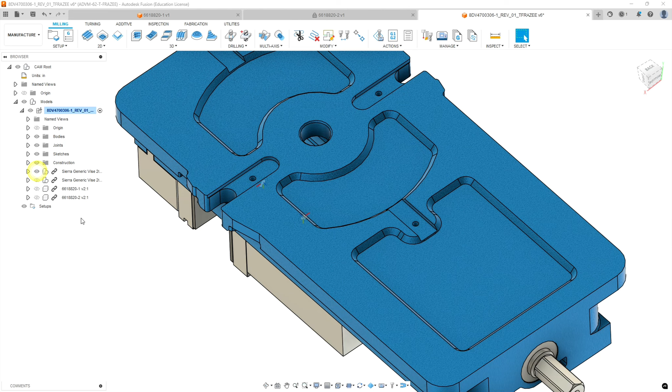Okay, so we're going to do machine operation 1 first. So let's go to manufacture mode, and we're going to look at our models, and we want to make the second instance of the vise and the soft jaws invisible and make the first instance visible. Flip our part back around. We're going to show our stock body, which we may have hid in the previous step.

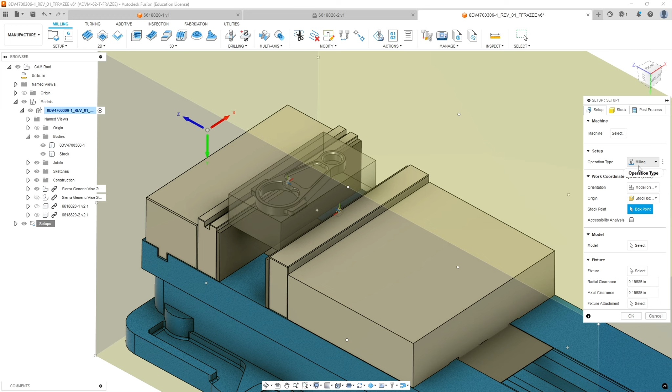And we're going to make our first setup. Right click, we're going to create a new setup. And again, it defaults to taking everything. That's not what we want. So we're going to go to selecting our model, which in this case is going to be the actual part on the bodies. And then we're going to go to stock, and instead of relative size box, we're going to go from solid. And the solid we're going to select is the stock that we modeled. Should be 4 inches by 1 inch by 2 inches.

Now we're going to go to the post processor, and we're going to call this 306-1 part. So it'll be 306-1, and we're doing op 1. Our program comment is going to be op 1. And I'm going to put in a note, hard jaws with 1-5/8 parallels. Okay, so hopefully that all fit in the notes. Makes that clear. We're going to use work offset 1.

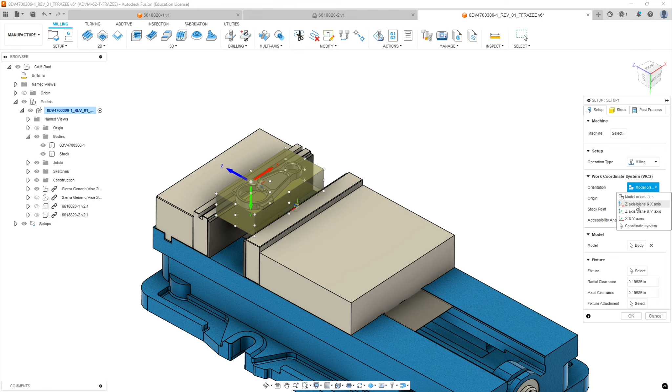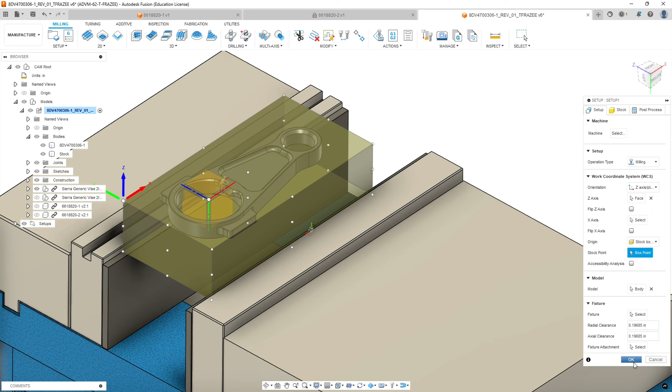Okay, we're going to go back to the first tab, which is the setup, and we're going to select our origin. So we're going to go to z-axis plane and x-axis. We're going to select the stock, which will give us the z pointing in the right place. Okay, we're going to put our origin at a stock box point. It's going to be top left corner. Now we're going to select OK. We're going to change our setup to op 1. Okay, so now let's make our stock volume invisible. Since it's defined, you'll still see it when you have the operation highlighted. And let's start machining here.

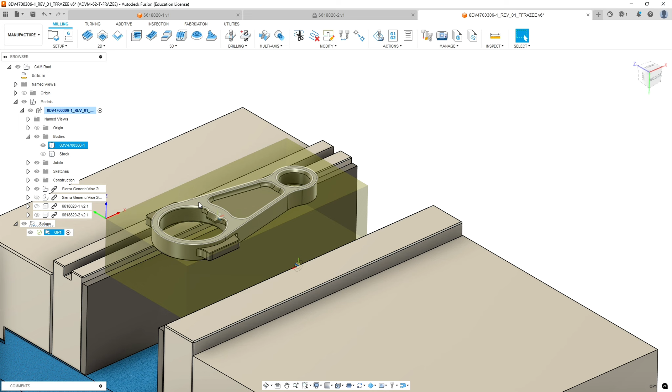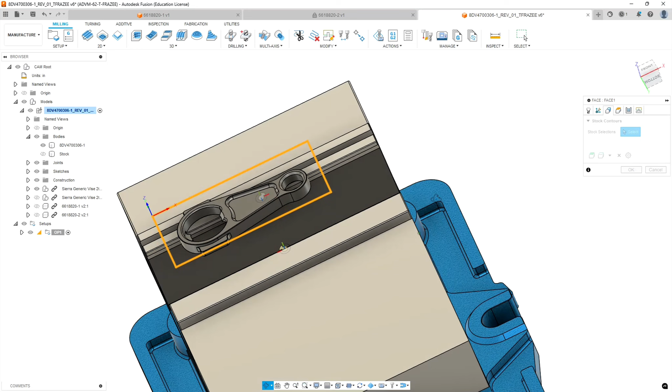Okay, for our first operation, we're going to mill down the face of this. We're just going to use our trusty face mill. We're going to do a facing operation. We're going to select from our tool library, tool 1, our 3-inch face mill. For geometry, the default boundary that's defined by the stock. We're going to go to heights, and we're going to leave most of this at default, and we're going to start at stock top and cut down to model top. Okay, so it should look something like that.

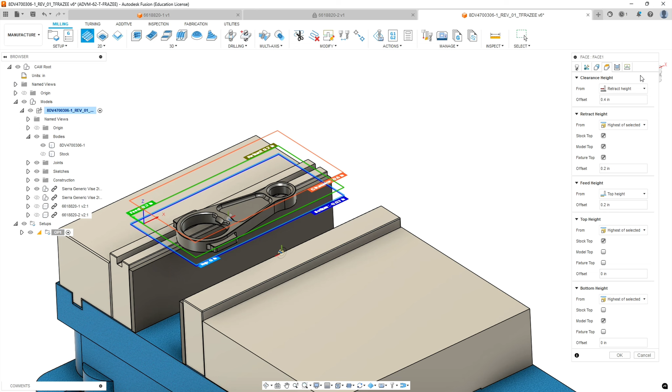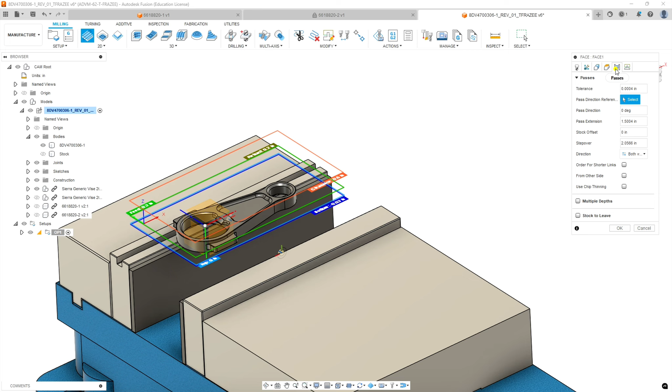That's default. I do want to say, if you don't already default to 3000 RPM, let's bump this RPM up to 3000. We're getting a better finish. If it already defaults to 3000, then I've fixed it in our tool library. Okay, we're going to go to heights, leave those at default again. We're going to go to passes. You can choose the pass direction. We may just take the default. Our pass extension right now is 1.5 inches. Some of our stock is coming in a little bit longer than it should be. So let's bump our extension up to 1.75. So it gives us an extra 1/4 inch of extension.

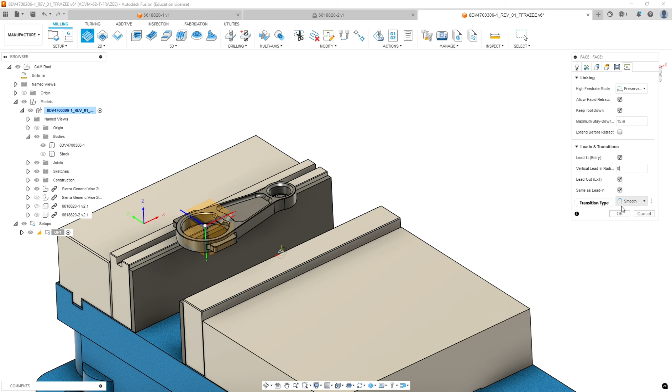And our step over, I believe we can leave it default. We're not going to do multiple depths. We're only taking 30 thou off. And let's go to the linking tab. We're going to do a lead in entry. Our vertical lead in radius is going to be 0. And we're going to do a lead in and lead out. Is that okay? So you just get one pass. Comes in off the workpiece, goes across. Alright, next.

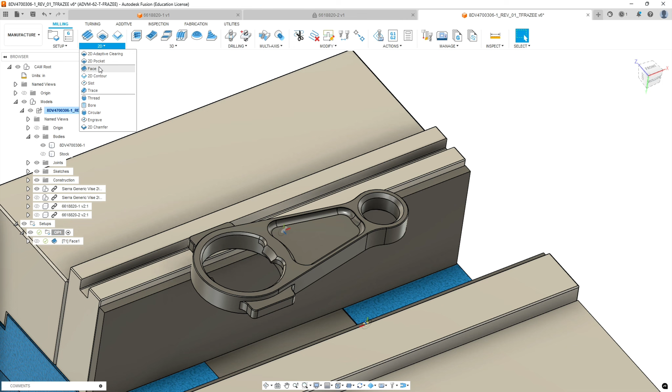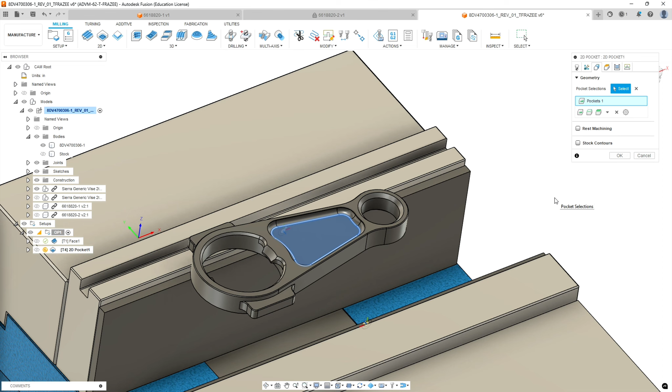Let's work from the top down. So our next feature is this pocket here. We're going to go to 2D. We're going to do a 2D pocket, and we're going to select our 1/4 inch end mill from our library. And what we're doing is we're just going to cut the flat here, and we're going to come back with a ball cutter and trace around the outside to make the fillet. This was intentionally redesigned to have a 1/4 inch end mill be able to go in this corner. If we change that design and add a tool to the library, maybe we can make that smaller and sharper like the original design. But we're going to get a pattern here in the center. All right, so our heights tab, we're only going 1/16 deep.

So I don't think we have a lot of depth to go. We're going to go from model top instead of stock top for both of these selections. We've already removed 30 thou. And we're going to go to the selected contour.

Now we're going to go to the passes tab. And let's go over our options. We are going to use morph spiral. Okay, that will give us a more efficient cut. We will do multiple depths just because we want to do a finish pass on the bottom, and that's a nice clean step over there.

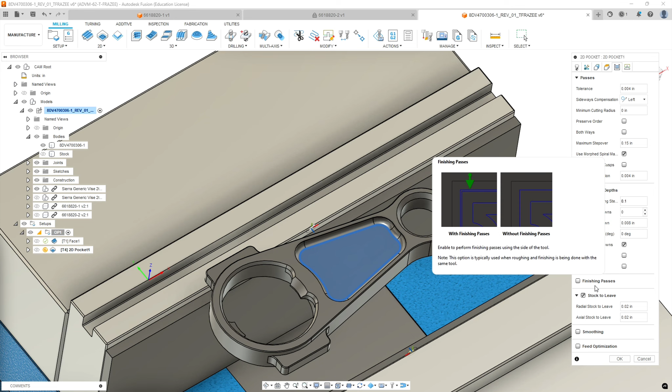And our maximum step down, let's set that at 100 thousandths. And our finishing step down, we can leave it at 8 thousandths. We're going to use even step downs, go order by depth. On sides, for what we're doing here, I don't know if we really need finish passes on the sides, so we're just going to leave that alone.

We do not want to leave stock to leave. I'm in the habit of zeroing these out before I deselect this box, as at one time there was an error in Fusion where even if you deselected it, it kept those values.

Okay, we're going to go to the linking tab. We'll leave most of this at default. We'll leave our horizontal lead-in radius. Our linear lead-in distance is fine. We're going to put 0 on our vertical lead-in radius. Okay, ramp type. We don't have a lot of room within this part. We'll try a helix. If it doesn't work, we're going to do a straight plunge.

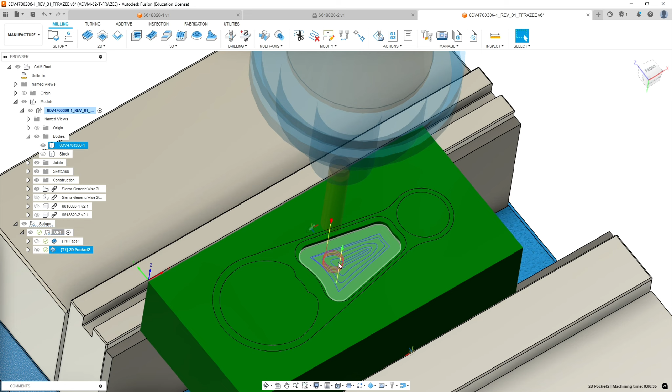We do want to set our ramp clearance height to be a little lower. 100 thousandths is a long time to spiral down, so we'll go to 50 and we'll hit OK. All right, so we get our helical ramp in. It's going to come in and it's going to do our cuts. Okay, so that's our pocket.

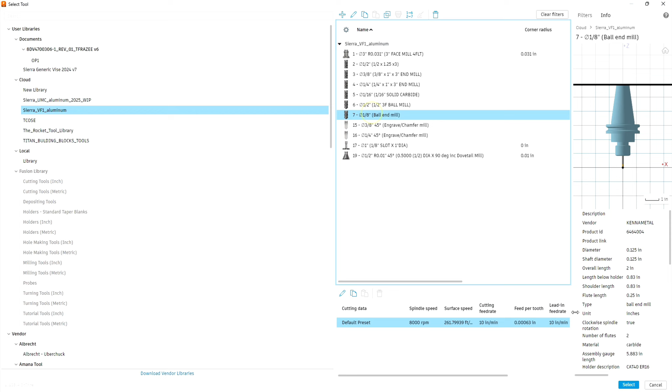We're going to do the ball cutter on the outside. So to do that, we're going to use the trace command, and we're going to select our 1/8 inch ball from our library. Okay, we're going to leave everything at default on its feeds and speeds. On geometry, we're going to select the chain of the tangency of where the ball touches the floor.

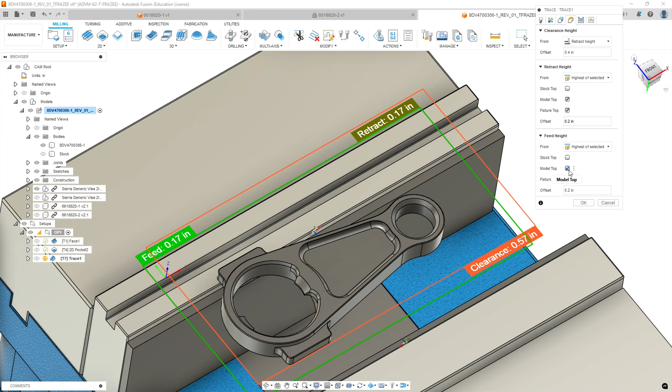And in our heights tab, we're going to go from stock top on both. We're going to go to model top on both. And then we're going to go to our passes tab, and we're going on center, and we're going to select this multiple depths tab. Our maximum step down right now is set at 40 thousandths.

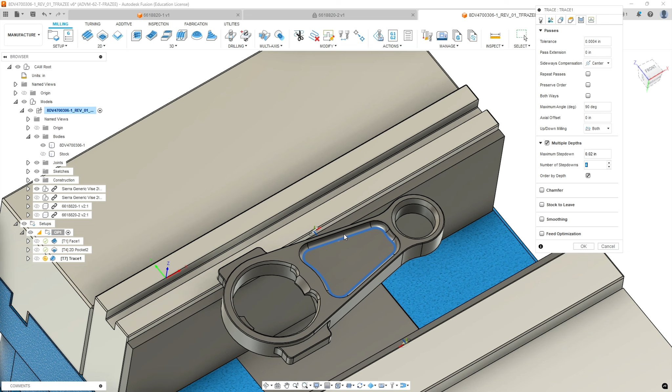Our pocket is only 63 thousandths or 70 thousandths deep, so we want to go a little bit less than that. Let's go 20, because we're going to have half the diameter of the cutter engaging at any given time. We're going to do 4 step downs, maximum of 20 thousandths, and that'll get us to the floor. Okay, we're going to go to the linking tab. And for this, you typically don't want a lead-in and a lead-out. And let's hit OK.

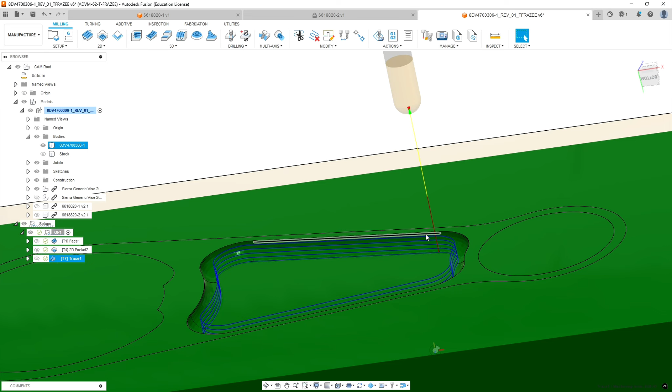So you're going to get 4 passes going around at least. Looks like 1, 2, 3, 4, 5 passes. And it's going to go around and make our cut. Okay, so we're done with this feature here. Now let's move on to what is our next feature we can cut.

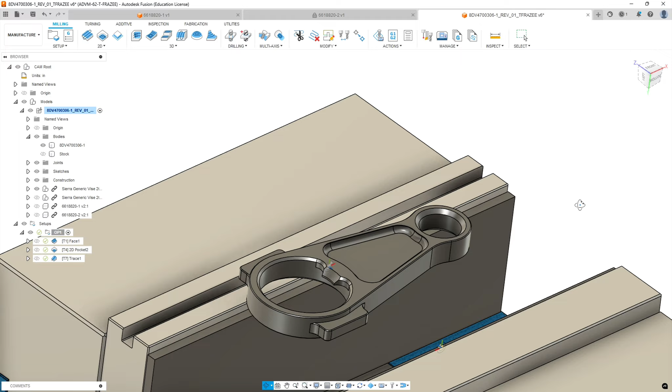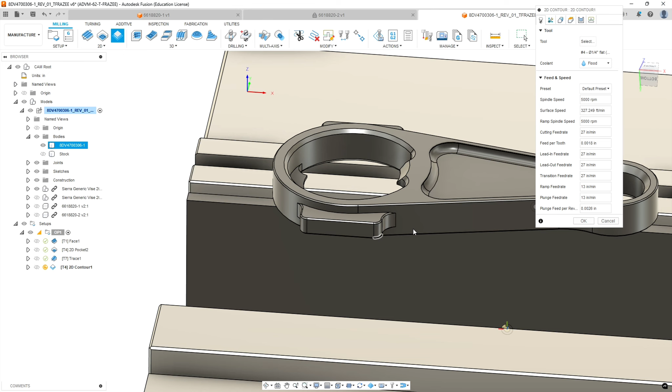So the next flat plane would be the tops of these 2 wings of the hammerhead, if you will. And we're going to come in. So we're going to use a 2D contour. We're going to go back to our 1/4 inch end mill, which we want to look at the tools we're using and in what order they go in. After this, we may want to rearrange the order so we have less tool changes.

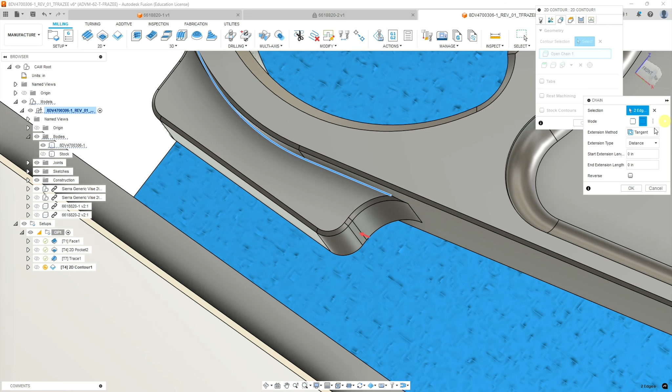But we selected our tool. Under geometry, we want a chain that includes this edge, offsets to the left, but we want an open chain. And we want that open chain to include the area of this fillet. Alright. So that's our first chain. We're going to go over to the other side and do the same thing.

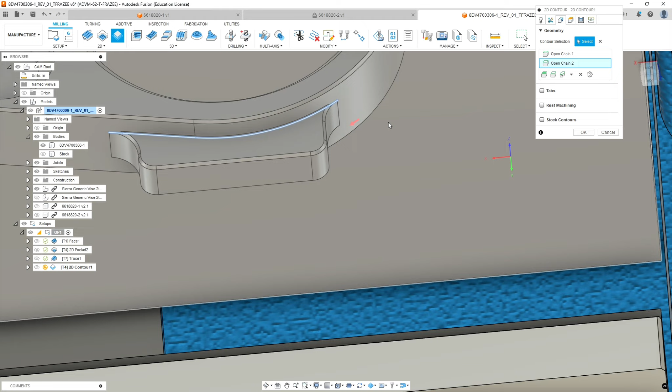So on an open chain, we want to start and cut all the way across. And we're going to hit OK. Okay, so that gives us, we want to make sure the arrow is definitely on the outside. And then we're going to go to the Heights tab. And we're going to go from Model Top. And our retract's going to come from Model Top.

And we don't want to go select the contours because it's going to set the depth at the bottom of this first element we selected. So we're going to go to Selection and we're going to pick on the face of the tab just to make sure that the height's set at the correct level. Otherwise you're going to cut the material that your chamfer's on off.

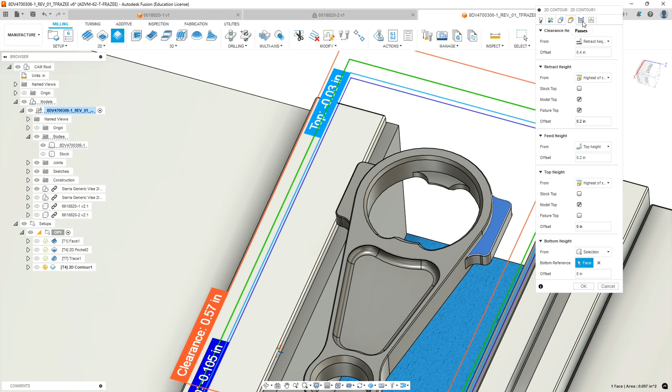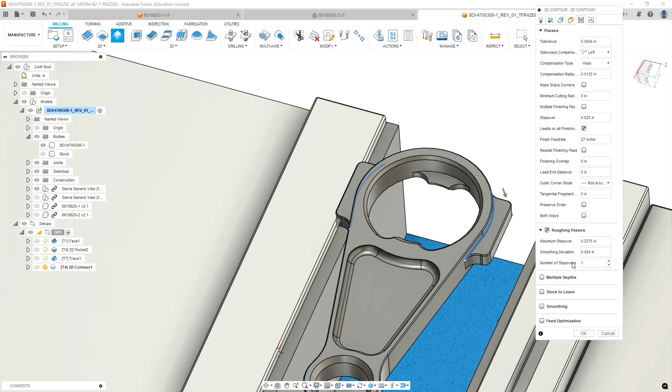Alright, and then we're going to go to Passes and we're going to go to Wear Compensation. We're going to leave all that at default. We're only taking 100 thousandths off. So we're going to do a rough pass. Our maximum step over can leave the same. Smoothing deviation 0.004. But our step over 25 thousandths is fine. So that's going to do one rough cut and one finish cut.

And then we will do multiple depths even though we're taking 100 thou off. We're just going to do this in so that we have a slight finish cut at 8 thousandths. Gives us a little bit better finish when the cutter is not under load. I believe this cutter is wide enough to clean up the entire top. We will see. And we're going to go to the linking tab.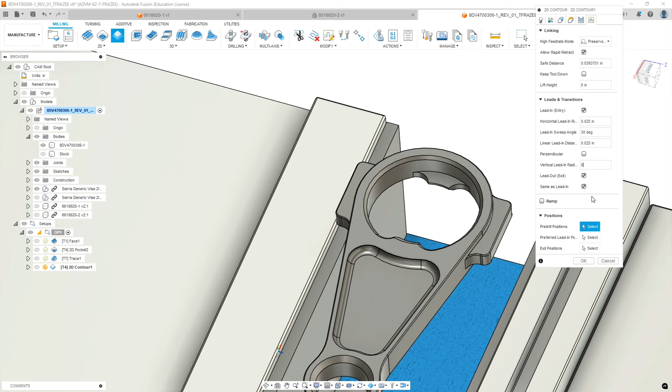We're going to leave the horizontal lead-in radius or sweep angle at 90, I guess is okay. We actually might want to consider changing that to 30. And we're going to have no vertical lead-in radius as usual. And let's hit OK and see how we get. Okay, so we get a 30-degree lead-in radius, a little bit of shallower angle instead of 90, comes in and cuts our pockets. And it looks like it did full cleanup on the top.

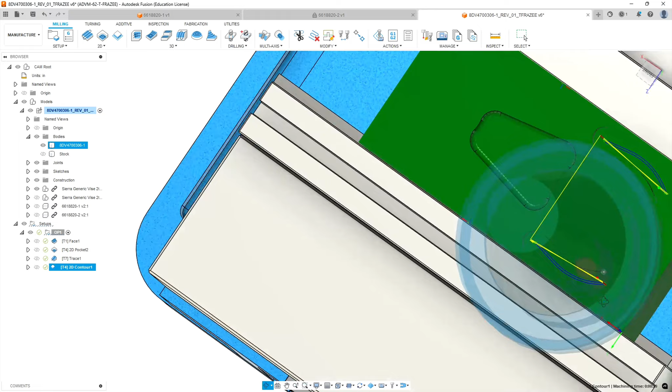What do we do next? So we've cut this pocket, we cut that. Our next deepest thing is going to be this because it floors out at where the tab is. So let's go in with the 1/4 inch end mill and just stay consistent. It should leave the fillets in these corners the right size. So we're going to go 2D pocket.

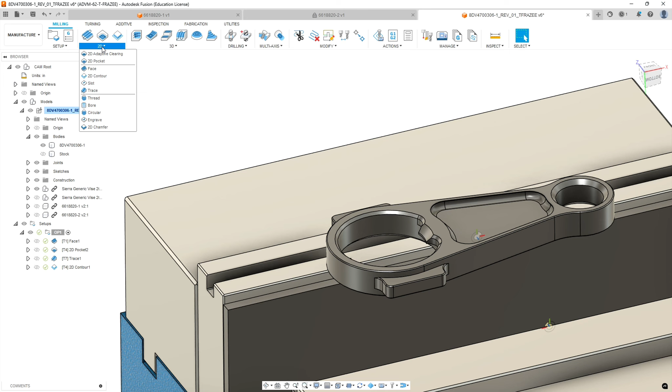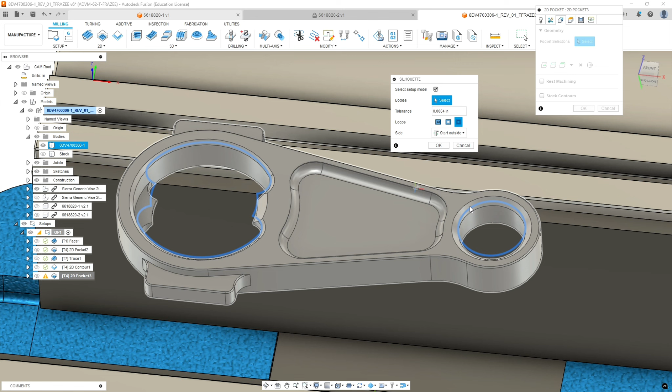Okay, on the geometry tab, we're going to pull down and we're going to pick this silhouette routine. And what we're going to do is we're going to end up cutting these two pockets all the way through. So we don't want to machine the outside boundary. We're going to go from select to for outer loops or inner loops. So we're going to select inner loops. It's only going to cut within the blue boundary on the left and the blue boundary on the right. Okay, we're going to hit OK.

Then we're going to go to heights and we're going to start at model top on both of those. And our bottom reference will be not selection, but the lowest of selected, which is going to be model bottom. We're going to cut all the way through, and we want to do a negative offset of 10 thousandths so that we make sure we don't have any flash when we cut off the other side. It'll compensate for any tool setting differences.

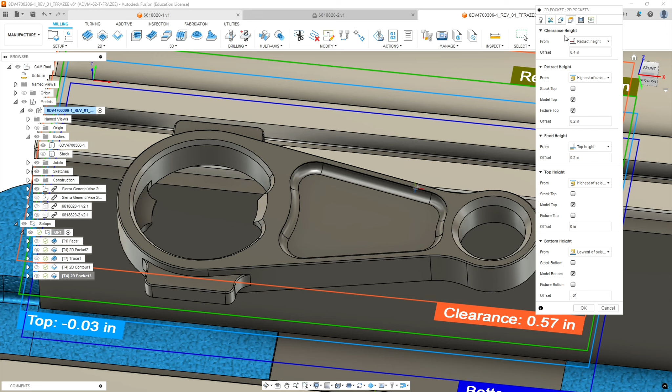So we go to the passes tab. We're going to change our maximum step over, should be at 150 thousandths. We're going to check morph spiral. We're going to go to multiple depths. Our maximum step down is going to be 1/4 of an inch. We're going to do one finishing step down at 8 thousandths. We're going to do even step downs. We want to include a finish step.

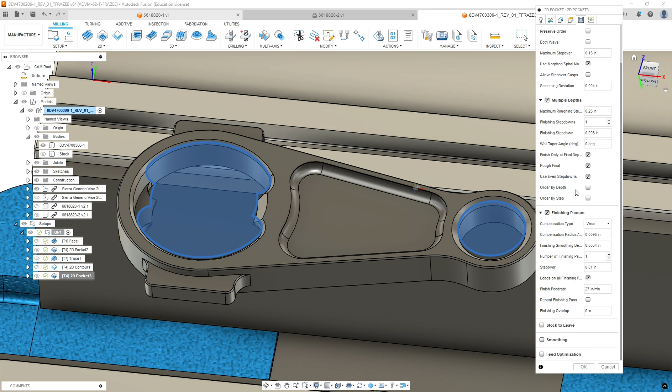So we're going to go to wear compensation, and we're going to do one finishing pass, and we're going to set that at 10 thousandths. If we go up, we want to make sure that we have the finish at final depths box checked. We have enough flute length to do that with this cutter. Okay, we're going to go to our last tab. We're going to keep the tool down.

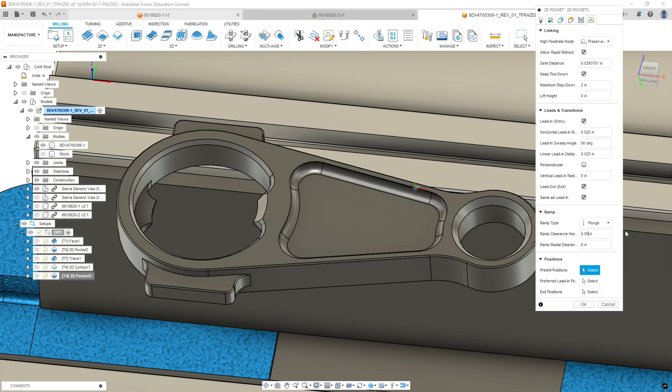We're going to keep our lead-in radiuses and our lead-in. We're going to get rid of our vertical lead-in radius. And our plunge type is going to be just plunge. It defaults to helix, but we're going to change that to plunge. And we're going to change our clearance from 100 to 50 thousandths for plunge clearance. And then we're going to hit OK. And it should machine out both of this round feature and pocket down the center based off silhouette.

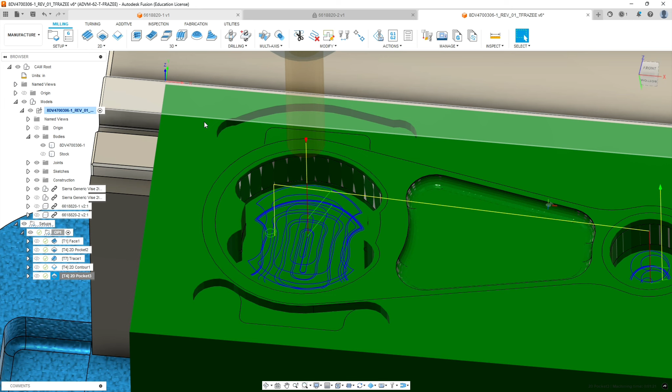Okay, now we have this other piece of geometry here, which is a tooth here that still should be there, that we need to mill out above it. So our next operation is going to mill this face down. So we're going to go to 2D, we're going to do a contour.

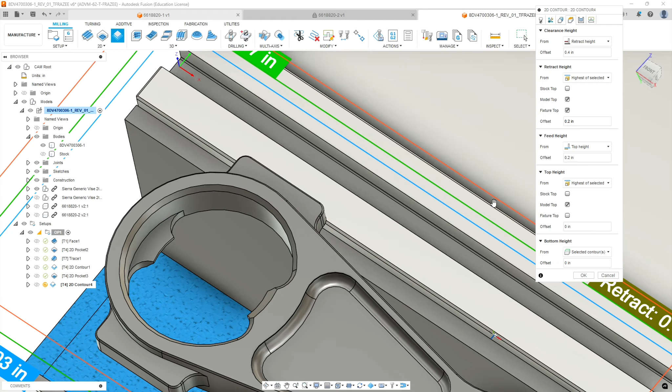And it's important we do this in the same setup with the same cutter diameter so that we don't get cutter mismatch. Okay, so we've got our 1/4 inch flat selected. We're going to go to geometry, and we're going to select the little segment here for the profile. And then we're going to go to the heights tab, and we're going to go from model top on our retracts. And we're going to cut down to the selected contour, which is fine.

We're going to go to passes, and we're going to go to wear compensation. We are going to do roughing passes, and that allows the step over box to appear up on the top. So let's change that to 10,000 so we're consistent with the other things we're machining. Our maximum step over, we're only going to do one, so it's kind of academic. This is already cleared out. We're going to do one step over. Our smoothing deviation is going to go up to 4/10.

We are going to do multiple depths. Our maximum step down is going to be 0.25. We're going to have one finishing step down at the bottom as a spring pass. 8 thousandths is fine. And we're going to finish only at final depths. And the rest of this, we're going to use even step downs. We're going to go over to the linking tab. We'll leave our horizontal lead-in radius the same.

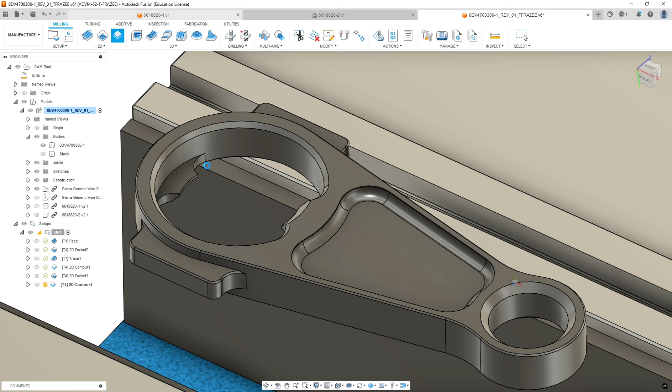Our lead-in radius at 90, I'm going to change that to 30. That way we're not coming 90 degrees to this arc. We're going to come in at a slightly more tapered angle. And we're going to get rid of our vertical lead-in radius. It's going to be 0. And we don't need a ramp. So we're going to hit OK. So we get our one rough cut and our two finish cuts. That finishes off the shelf here. All right.

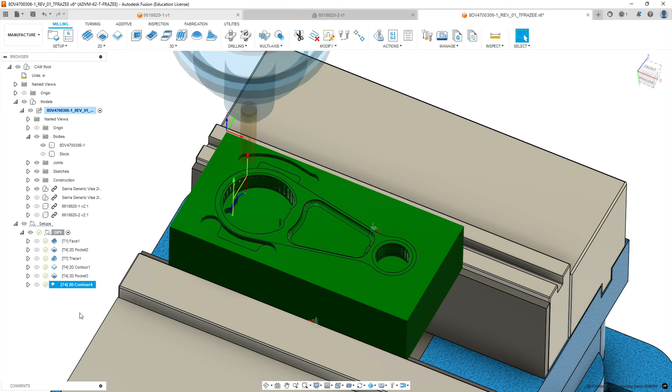Now our last little bit on this side before we start chamfering is going to be to remove all the material around the outside. So I'm going to use adaptive clearing mainly just to clear out all the stock volume that's around the outside of this thing. I could have debated, I could have done that in the beginning and maybe cleaned all this stuff off. But the efficiency we're looking for is just cutting out, removing all the material around that exterior. So we're going to go to 2D, adaptive clearing.

We're actually going to select from the aluminum library our 1/2 inch end mill. We're going to go with a bigger end mill. And I'm going to change where this goes in sequence and move it to the top. Okay, so 5,000 RPM. We're going to geometry. We're going to select our silhouette. And we're only going to do outside loops. We're only doing the exterior with this. And we're going to go to heights. Again, we're going to go to model top, so stock on these.

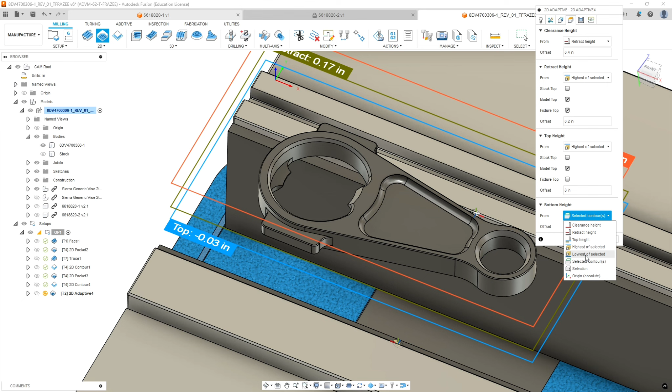Now, the depth we're going to go to is going to be the lowest of selected, which is going to be model bottom, and we're going to go -10 thou on that as well. And our passes, we're going to leave all of this at default. We are going to leave 20 thousandths radially, but axially, I think we can set that at 0. We want it to go to the proper depth. We're going to go to the linking tab, and we're going to leave most of this at default. No vertical lead-in radius. Ramp type, we can go to just straight plunge, and let's hit OK and see what we get.

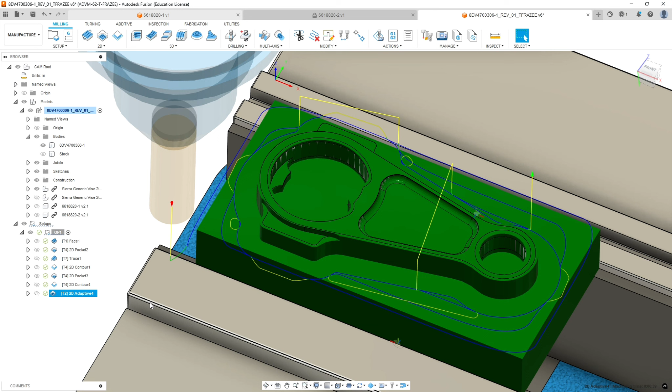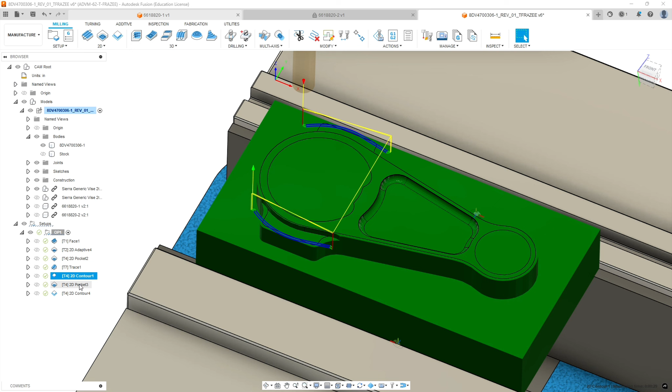Alright, so our 1/2 inch end mill clears away all the material that might be left behind that would interfere with this plugging into our soft jaw. Now, before I forget, let's move this in sequence to occur right after the facing operation. So we're going to go facing, we're going to do our adaptive around the exterior, then we'll do our pocket, then we'll do our trace, then we'll do our contours on the outside, and we'll do the pockets on the interior and the contour on the interior. So I apologize for not doing that in order, a little oversight.

So now we're going to stick with this 1/4 inch end mill. We're going to do profiles around the outside edges, and that will give us our finished shape for the exterior.